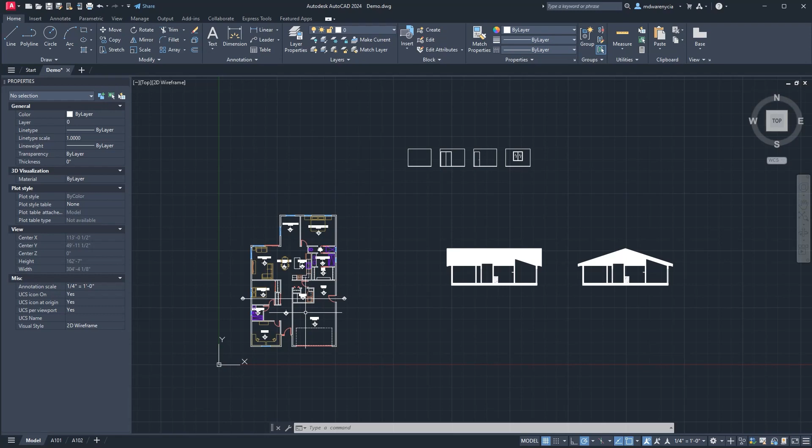This is something I'm looking for in your roofs. At some point I was building that slope with a 12-inch run and a 4-inch rise, so this is a 412 - it goes up 4 inches for every 12 inches it runs. Then I drew that thing with 1-inch increments. So this would be a 412, this would be a 512, this would be a 612, and so on. This is how we talk about the slope of a roof.

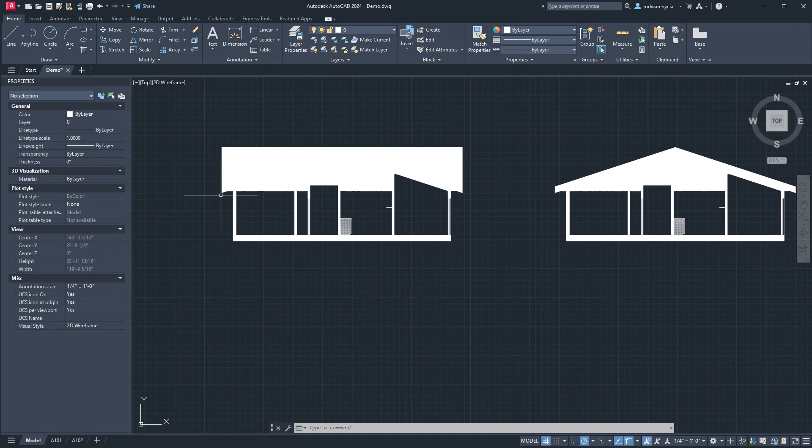412 is completely fine for my class, and this is kind of what I'm expecting as far as what you should be creating. I don't care if you do this style or this style, and theoretically this should be higher up, but this is what I'm looking for in terms of a section cut, though this isn't a good one for my model.

Another thing I was talking about was creating the built-ins that were added to my utility space. The counter over here comes up 36 inches. You have a 1 inch down, 1 inch back - that gives you the countertop. Then from the bottom, from the counter face, 3 inches back and 3 from the floor gives you the toe kick.

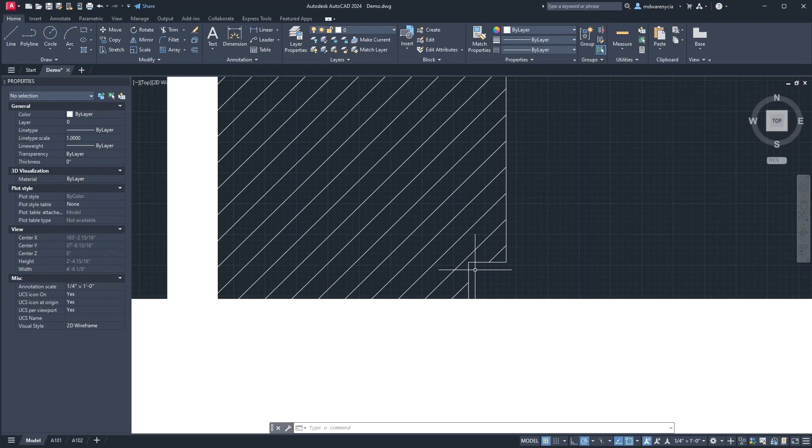This was that shelf I put over my washer dryer unit that will also be built in. Some of you might have a closet that needs the same treatment. Some of you might have a section cut going through your kitchen, so you'd need to do something similar for that kitchen space.

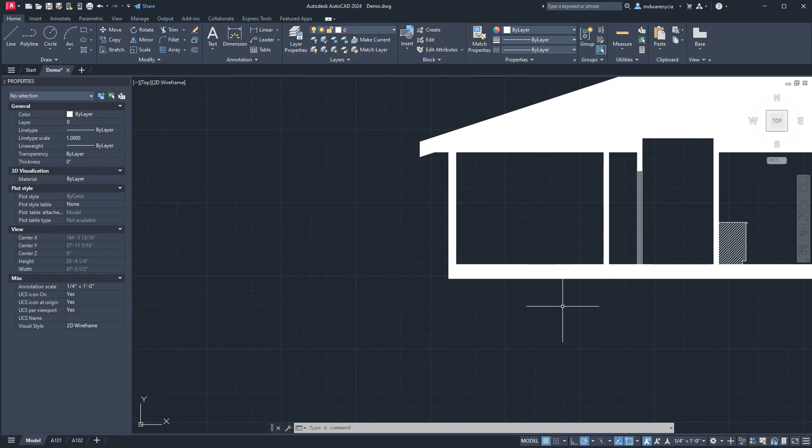So let me do that closet real quick. I'll grab this line right here. These are hung at - oh, I don't remember. Okay, Google says 66 inches. So we'll grab this line, offset 66 inches up. That will be our pole height, 1 foot from the back.

So if I just move this 1 foot over, and then switch to diameter 1 inch - that right there is the pole. And then let me get the closet shelf height.

Looks like - let's see what Bob Vila has to say on this. Bob Vila doesn't say. Well, let's do 3 inches above the center of that. That feels right, so I'll offset this 3 inches up.

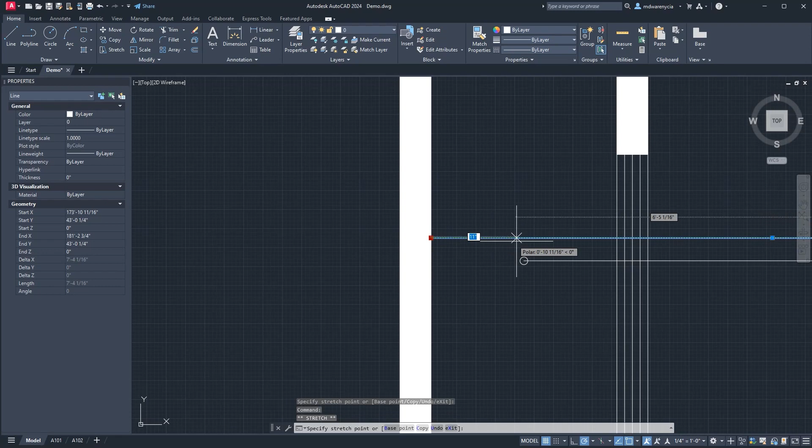And then I was using 1 foot 3 inches for the front of that. So now I can grab that and just move it back. We'll offset this 1 inch, cover the face of this, and get rid of that.

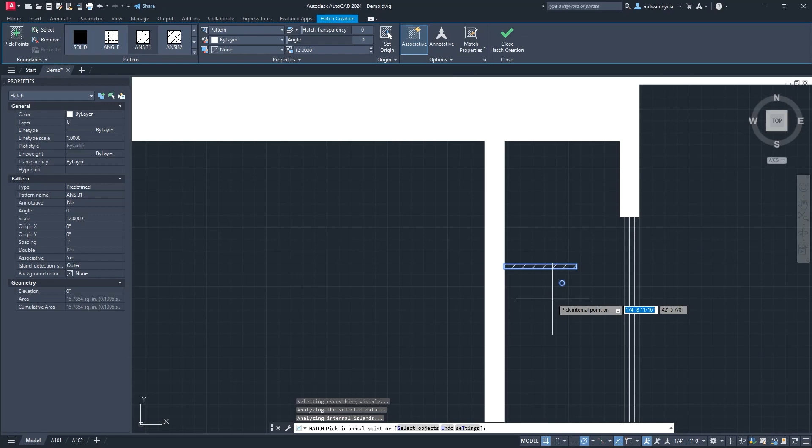And then we'll hatch - I think this was the right one - to indicate that there's something minor cutting through here. The hatches indicate a minor cut, something that isn't physically permanent in the building, whereas the solid hatch, the fill, indicates a permanent thing. So that's our section cut.

This is our elevations. I have 15 or 16 more elevations to go. I have no idea how I'm going to break this video up tonight, but I'm probably going to just keep jamming and get the rest of this done.

Yeah, that whole last video is kind of a wash. I forget everything I talked about. Let me look that over real quick and I'll get back to you guys.

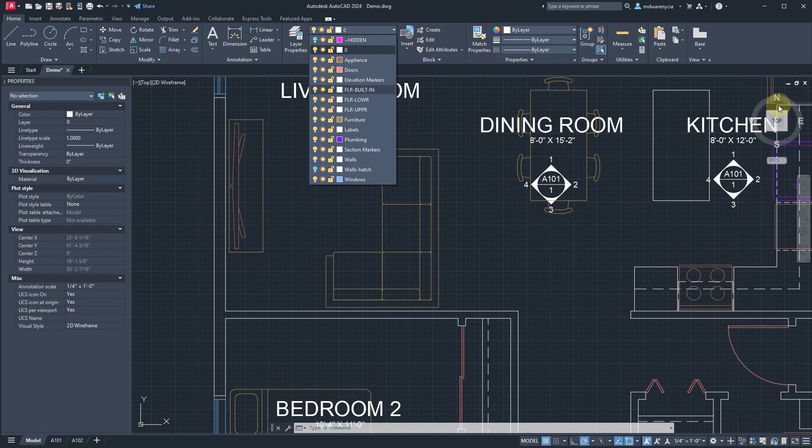Okay, so I'm skimming back over the video. It looks like I was discussing the different layers I had added in here. I have appliances for things like the fridge, and I have the plumbing layer. I mentioned the little circles that indicate the drainage for the showers and bathtubs, and something that helps differentiate a sink.

I was talking about how I had created this built-in for the walk-in closet, and then I think I mentioned that I'm going to need to create different elevation markers.

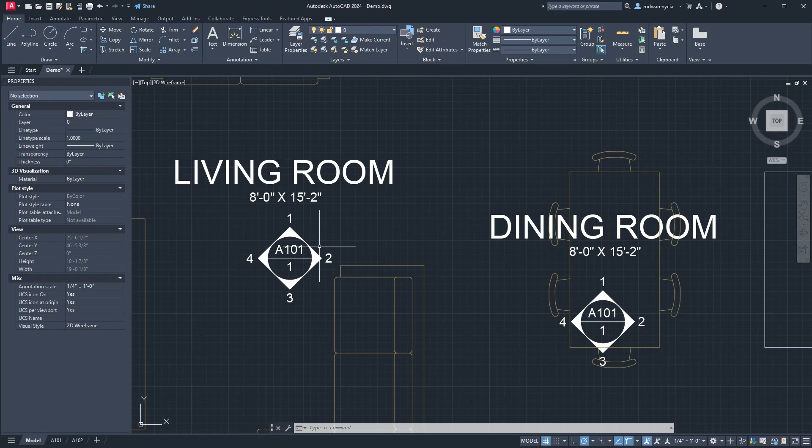This one, I'm not going to show an elevation of nothing on this side of this space, so it would just need a 134. This one - I probably wouldn't actually do an elevation since there's nothing really in that space. This one would be a 123, and this one would be a 124. So I will have to create new elevation markers for some of these spaces.

Let me skim through here a little bit more. I missed making the bed of furniture, and then I got on to creating those cabinets in the section cut, building that, building the roofs, and that was it. Yeah.

So this I think will be my last break for this, and I'm just going to jam out the rest of my elevations now. What am I at? A couple hours - ugh, I think I'm getting close to 2.5 hours right now. So I'm just going to jam out the rest of my elevations.

I should probably go over these. When I created these hidden lines, I have two different types: a lower one for my floor and an upper one, which helps differentiate what's going on.

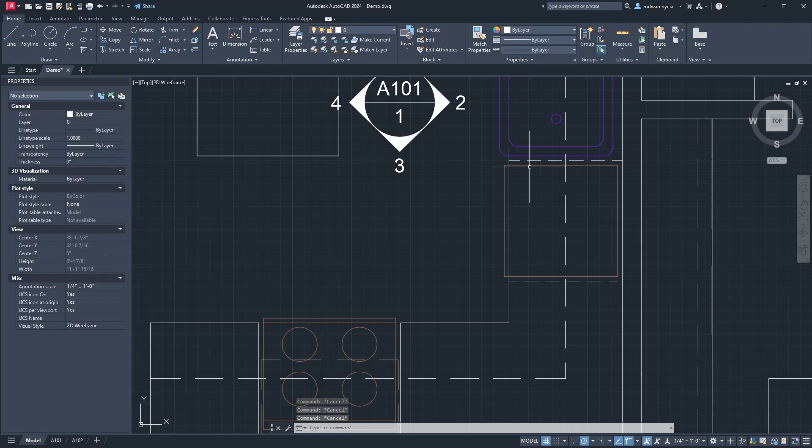The cabinets, the poles for the closets, the upper cabinets, and the shelf here are all designated by the upper line type, whereas the cut for the dishwasher and the section of countertop below the sink are designated as lower.

I mentioned the doors too. This is a 4 inch interior wall. I have offset 1, offset 2, offset 1. This door is the width of this space, and then you close that off, giving you a pocket door in case that comes up for anyone.

That's about it. I'm going to jam out the rest of these elevations and then start figuring out how I'm going to stitch all these lectures together. Back to the fast forward.

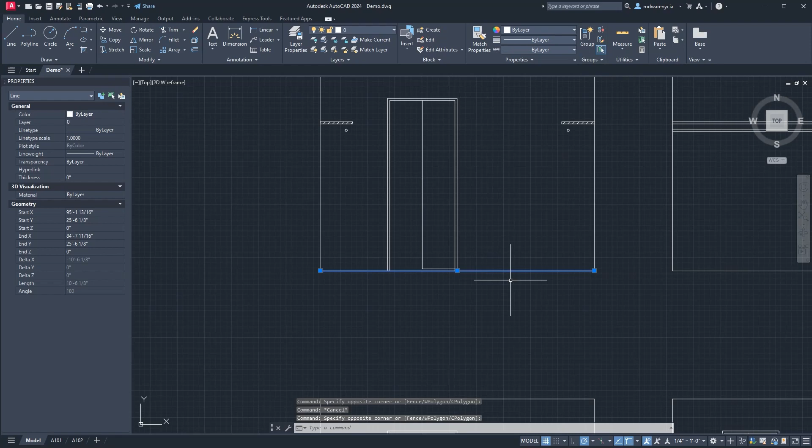I'm going to cut in here one last time. I've gotten most of the rooms done in this jam. I still have the kitchen, dining room, living room, and another space I haven't determined what I'm using for. Don't worry about those, I'll delete them so we're all on the same page.

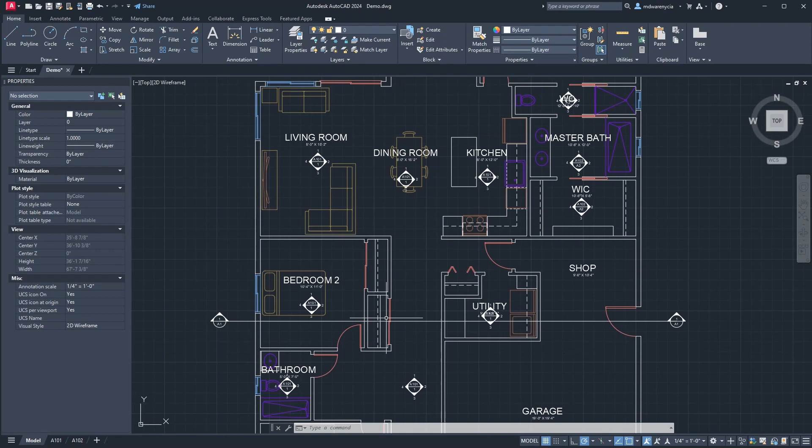You're not doing the garage elevations. I was just putting markers around, don't know why. So don't do the garage, or a shop if you have one. We're looking at only interior spaces. Do not do closets unless it is a large walk-in closet like the example I did.

A couple things I want to mention. As I was going around, what is this? Did I do this one wrong? Actually, I think I did that one wrong.

A couple things I've done here: if you watched what I was doing, there was a lot of copying and pasting. I took this door and pasted it here, took that door and pasted it here, then mirrored it for this one. I did this desk, then did this desk and extended part of it, and this got mirrored over here.

Other things I did, like this cabinet got mirrored around a whole bunch of times. This little shelf with the pole and the cabinet, I actually copied and pasted some of those from the section I'd already done.

So when you're doing this, think about different ways you can reuse things you've already drawn. I was honestly dreading doing the walk-in closet, worried about how bad the shelf would be, but I just knocked these out, copied some from where I'd already made the sliding door. That was the hardest part, and the rest came together pretty quickly.

These two faces are basically identical - I could have mirrored them to each other too. Same thing with the utility room, which was probably the worst. Even then I got to copy this cabinet several times, same with that shelf.

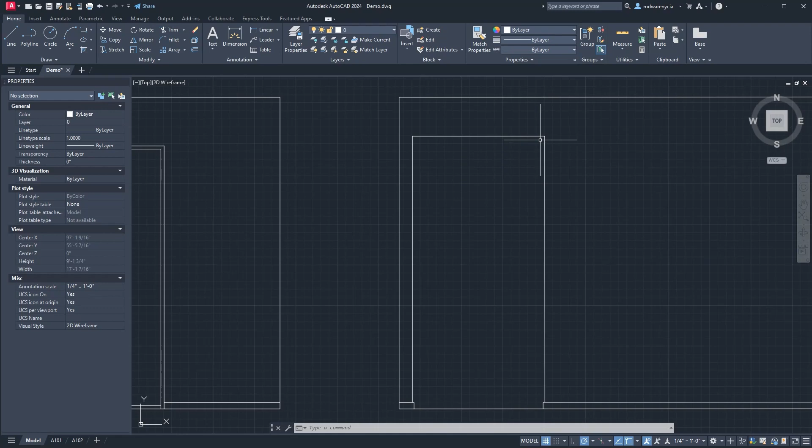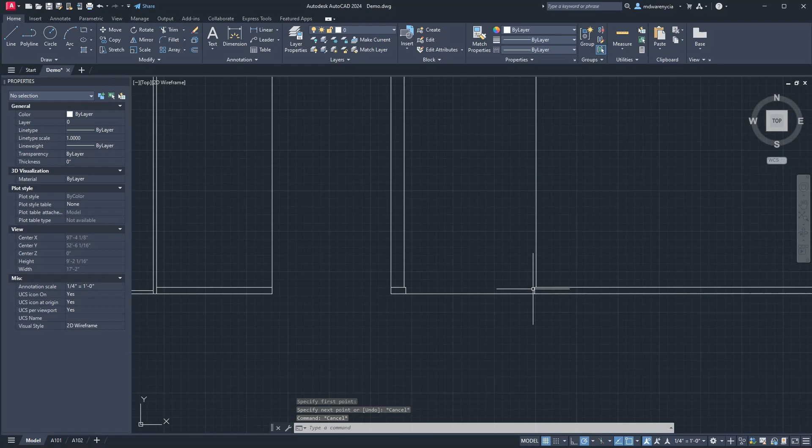I actually did an offset of 7 feet from the ground for this. To designate that this is just an entryway into a new space, I came in a little bit - about a half inch with that baseboard - to double check. If you notch that in a little bit, it makes it clearer that the baseboards continue through here and this is just an opening into that space.

Continuing around, we're going through the front door and then to the other side of this hallway. What I've done here is similar - I have this notch, but I didn't do a 7-foot offset.

I'm considering this an open area that's part of that. So if we were looking at this, you'd actually see some kind of...

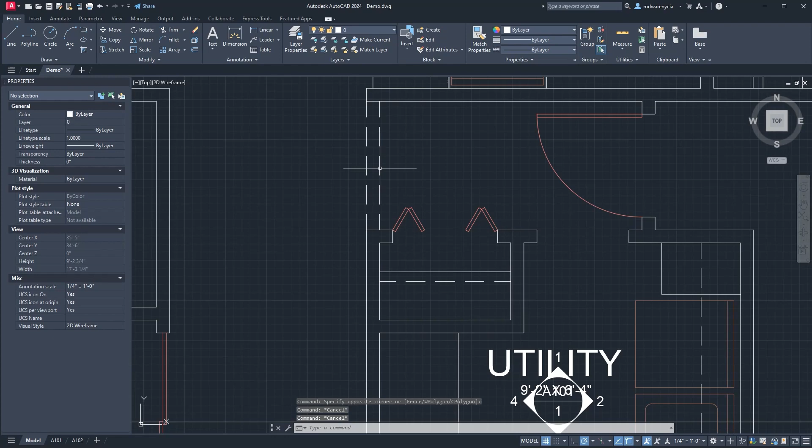...little space right here in the upper area where this would have framing going across the top, but this one wouldn't. This would be a flat ceiling all through this space.

Again, assuming that I didn't do this, which I'm not even going to get into for this project. We're covering a lot of ground already, and I have 3 hours of video to edit tonight. So don't go crazy on detail, I think is the other thing I wanted to mention.

Like this is my cabinet. Keep your cabinet simple. I've had students do things like scalloping on the doors and drawing individual handles and things.

Please don't do that. Don't try and draw your sink faucets in your elevations. It's madness. Eventually you can copy and paste it around somewhere, but don't bother.

I did make the front door look kind of nice because I thought that was important. My rule of thumb for things that I hash like this is if it's attached to that wall, and you would have to kind of cut through it, what I do is I imagine there's like a 2 foot...

Oh, I haven't done that bedroom either, did I? Oh no, I need to add a bed to this. I try to imagine that there's like a 2 foot cut.

So we'll take this room right here, this bathroom. So if I was to offset each of these about 2 foot...

2 foot, you'd see that as I'm cutting through this space, I'd have kind of different places where it would look.

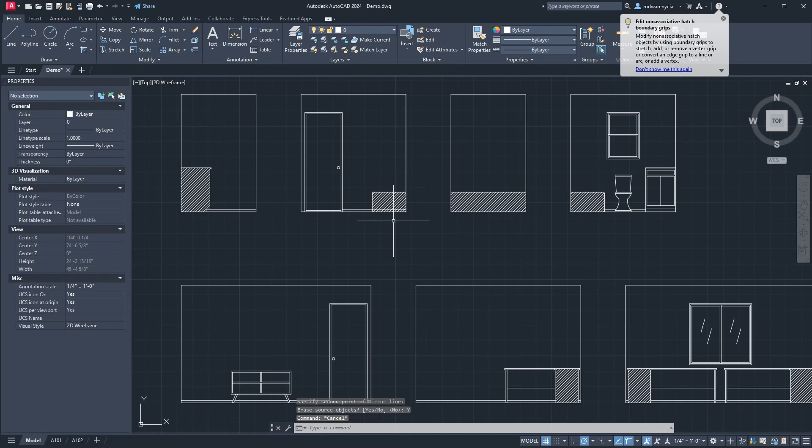...and then we'll just get that right there. So then this bathtub, and actually I think I can probably just delete this, stop it. This fill right here, because I did that for that one right there.

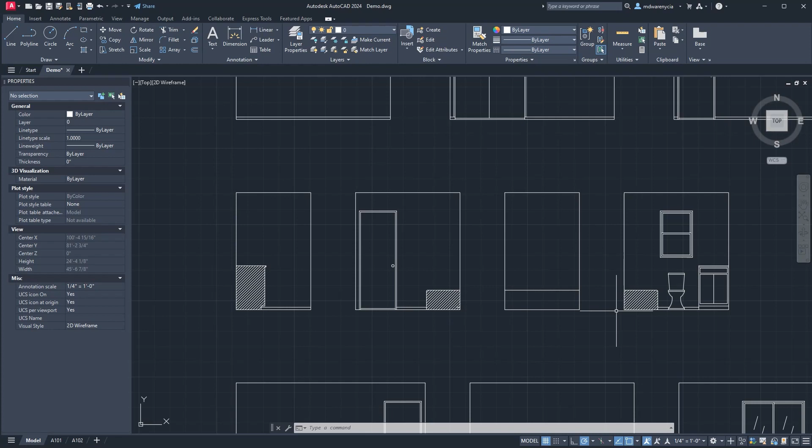So this would pass through basically the plane that we're working on in both cases of the tub, but the toilet's not far enough out from the wall. I see a thing, sorry.

There we go. The toilet's not far enough out, and the counter face is not far enough out. So maybe it's closer to a 1'8" or so.

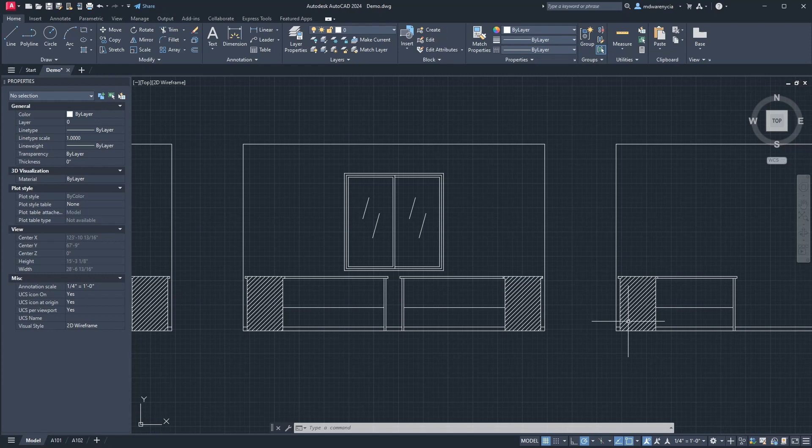Basically, if it's built in and it's something that you'd have to cut to see, that's when I cut things. It's kind of like in this case, I probably could have made this go in a bit and then come down and modeled the underside of the desk, but we've got things to do.

Same thing here. This is a built-in. This is an appliance that's going to take up that space. So it's the temporality of things.

Whereas here, I didn't feel it was important for me to show a cut through this because it's not against this wall right here. So those are kind of just decisions that I made...

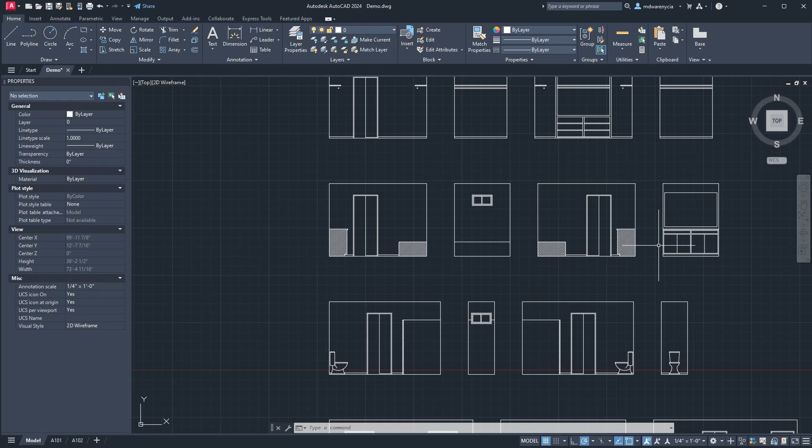...as what we're creating here is a communication. This is me communicating my design to the builders, and in that process, this is what I'm feeling is relevant. Something else I did for this shower that I haven't shown here is I need to have some kind of hatching, so we'll throw in some hatching there.

I'd probably make something different. Theoretically, I'd probably need to do something around this bathtub too, to indicate that there's tile or something there, but we'll just throw that in real quick.

Bed, again, I didn't get too fancy. This whole room was basically just copied and pasted and/or mirrored.

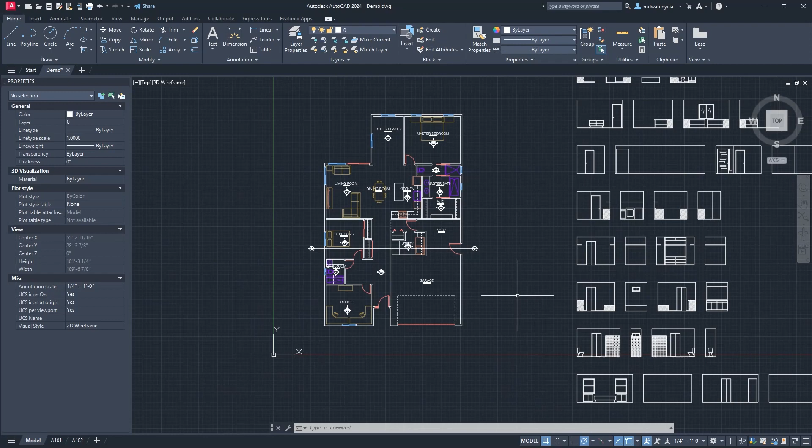So yeah, that's where I am. I'm not too far out. Like I said, I just basically have the kitchen and the living room. I wouldn't spend too much time doing dining room chairs and such, just because they're kind of a pain.

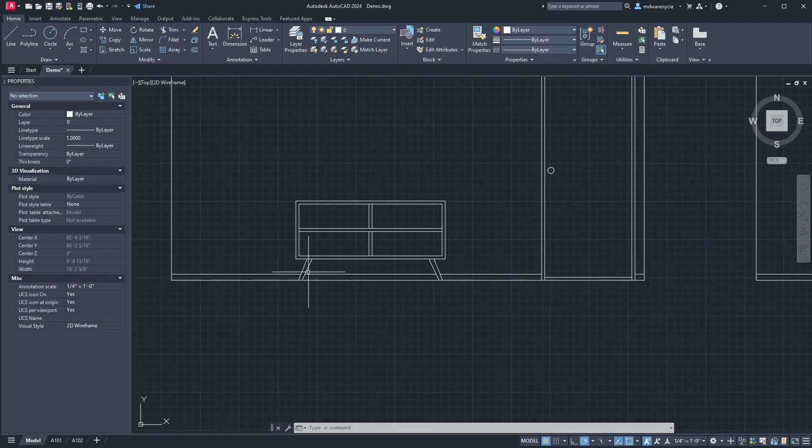If you watched me draw the legs for this, that's kind of the way that I would draw a chair, but it's super tedious drawing chairs. If you have a reference for one, or make it really simple, that's completely fine.

So yeah, this is where I am at after about 3 hours just kind of jamming. I got to start putting videos together, but I wanted to leave you with a couple comments about cranking out these elevations.

These are basically going to be the bulk of the work that you're doing for this project at this point, so I hope you guys are really comfortable with the tools because that takes time.

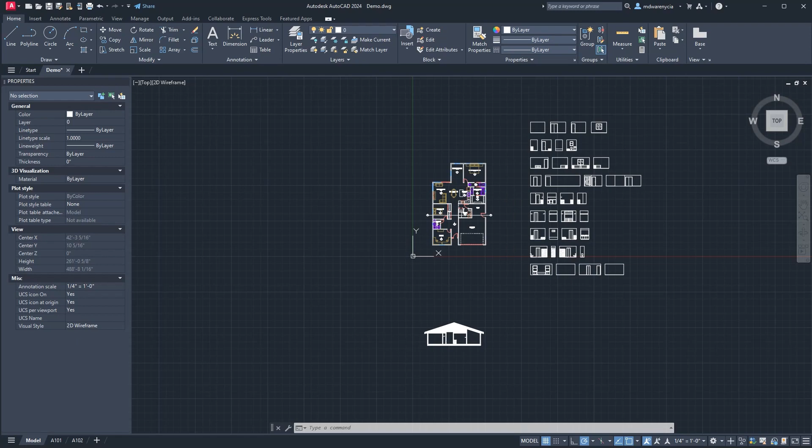All right, yeah, I will start putting these all together now.